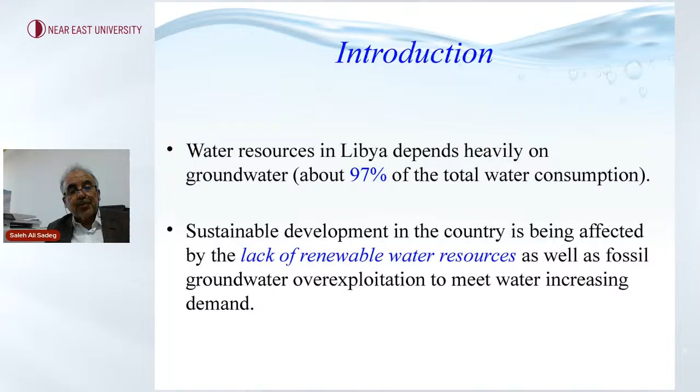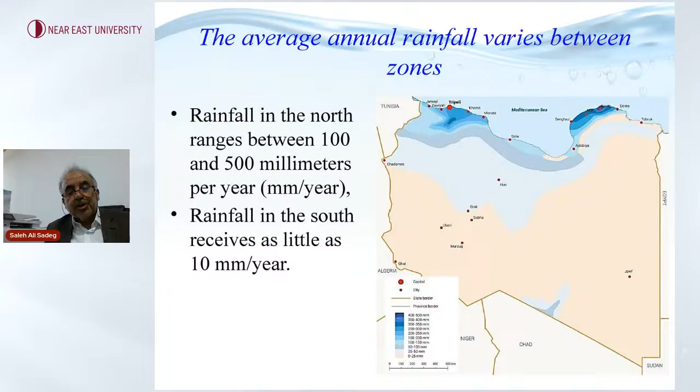The rainfall in the north ranges between 100 and 500 millimeters, while in the south area, which is mostly desert, from 0 to 10 millimeters. Especially in the last 2 years, there were rainfall storms in the desert parts.

Excuse me, can you hear me? Yes, we can hear you clearly. Okay, thank you very much.

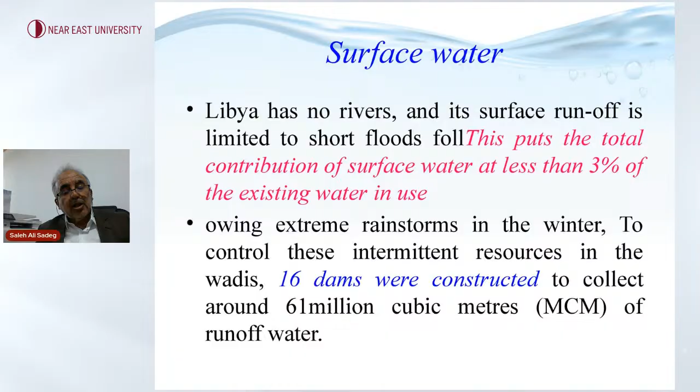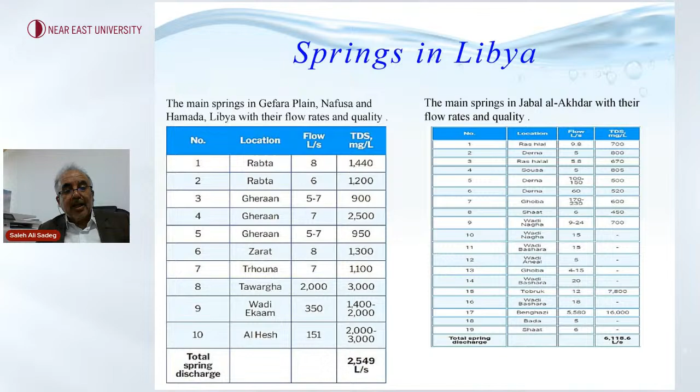The population of Libya is about 7.5 million in 2025. The water resource in Libya: in Libya there are no rivers, and surface runoff is so limited. Only in the northern part, in the west area and the east area, there are many springs, as shown in this table. For groundwater, as I mentioned in the first slide, it makes up 97% of the water demand in Libya.

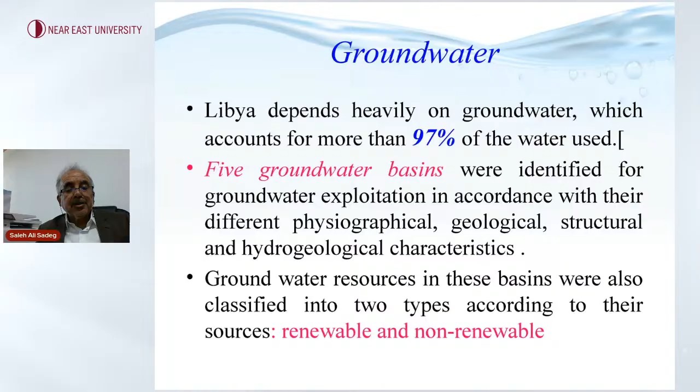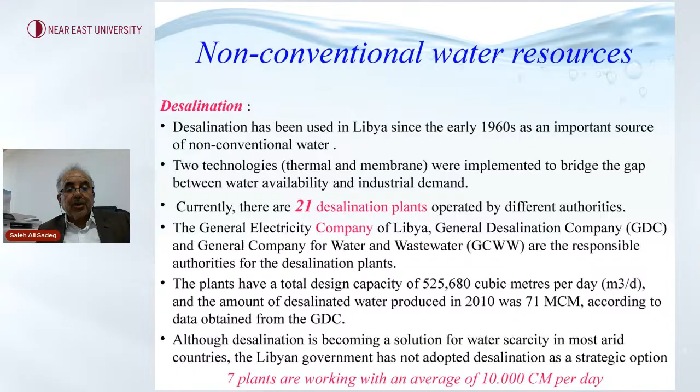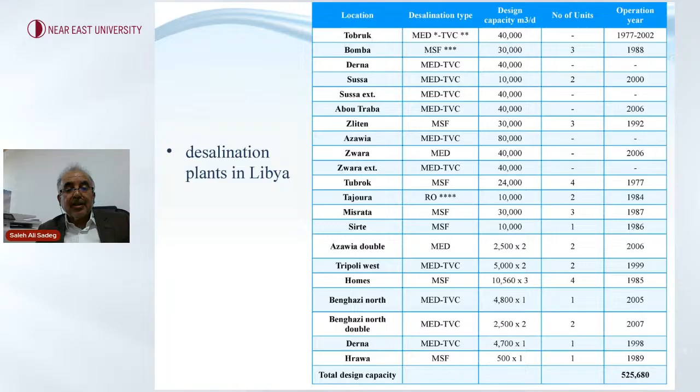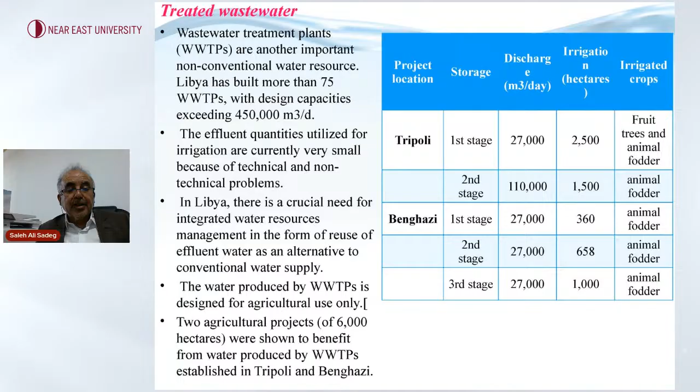For the non-conventional water resources, we have desalination and sewage treatment plants, as we will see in the next slide. This map shows the desalination plants. However, only 7 of 21 plants are working these days, with a production of 10,000 cubic meters per day. In the last 2 years, there was a program to rebuild and maintain some desalination plants in order to increase water production.

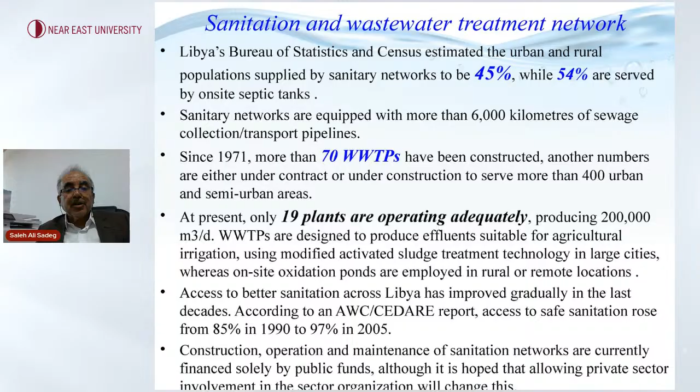This is for the sanitation and wastewater treatment plants. In Libya, there are many wastewater treatment plants; most of them are under maintenance and under construction. The other issue for water quality is seawater intrusion, as shown in this map, and more clearly in the next slide. This figure shows the water table drawdown starting from 1957, 1972 and 1994. This map shows the decrease of the water table in the Tripoli area, where we have the high population.

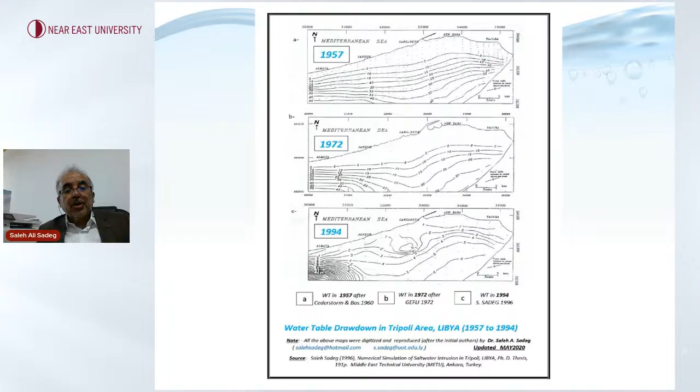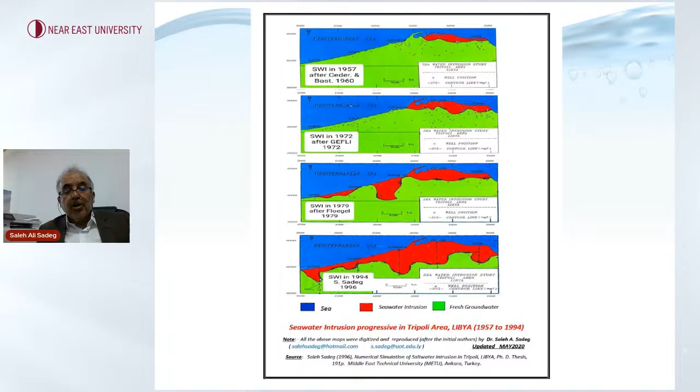The next slide shows the seawater intrusion. In the upper one, in 1957 the seawater intrusion was limited to the northern part near the sea. However, over time and due to high groundwater abstraction, the saltwater intrusion front has moved inland, as shown in the last figure from 1994. We also have seawater intrusion in most parts along the Libyan coastline in the east and west.

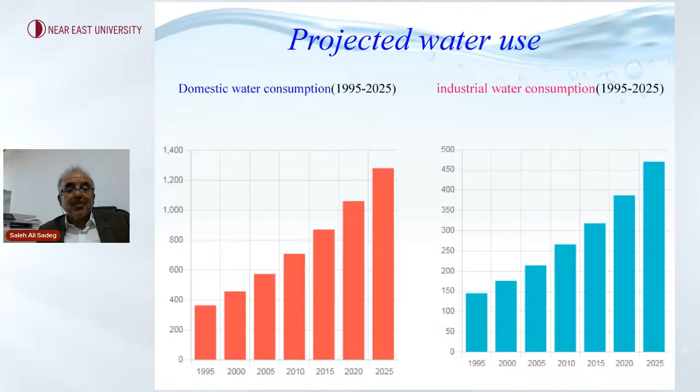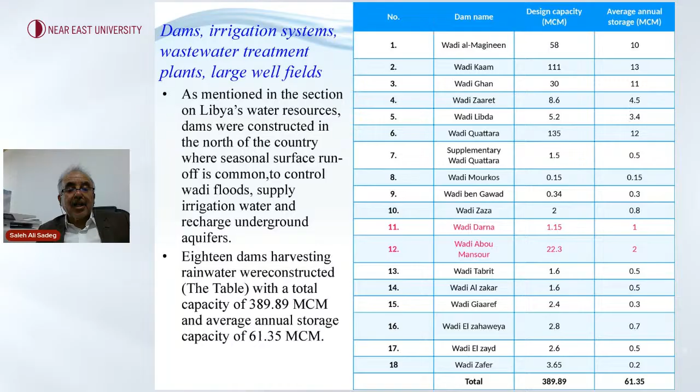In most of the agriculture, they use traditional irrigation, and this leads to high abstraction of groundwater.

We also know the Man-Made River project, where we have three phases. This is the first phase, from the southeast of Libya toward the east and middle, Sirte and Benghazi, where we have the second phase in the western part of Libya. This is to carry water from the Hassouna fields to Tripoli and some cities in the western part

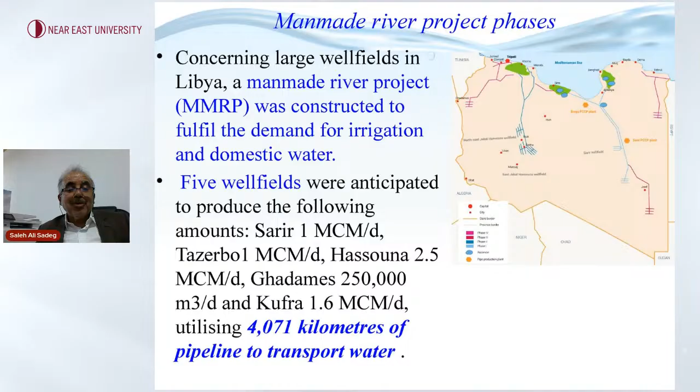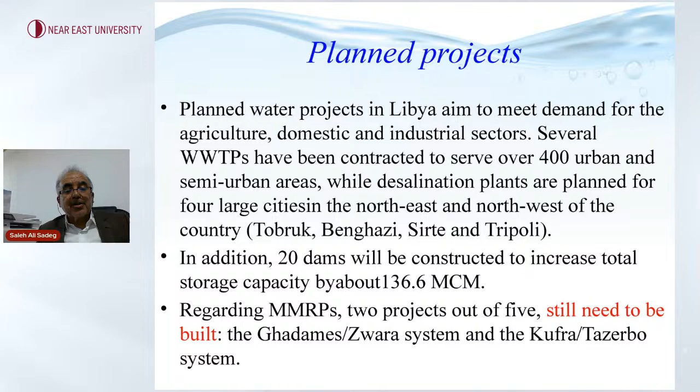of Libya. These days, it is carrying almost 4 million cubic meters daily. As a planned project, the Man-Made River Authority is planning to have two other parts, one in the eastern and one in the western part of Libya.

Water management and change in Libya: since 1972, the General Water Authority has been initiated. This is the only authority in Libya making research studies and even giving permission for any kind of water supply, wells, etc. Lastly, in 2012, a new ministry, the Water Resource Ministry, was established and still up to now is governing all the water subjects in Libya.

Water challenge in Libya. The rainfall is limited; even in the northern part, the maximum does not exceed 500 millimeters yearly, and the average is almost 250. For example, this year we are now in December, at the end of the year, and still we have had only one storm with limited rainfall.

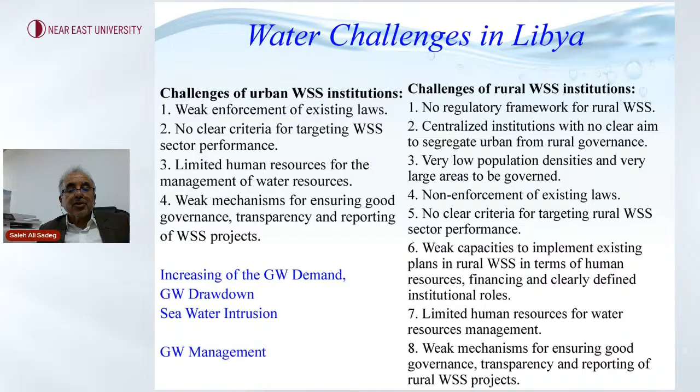So this leads to more groundwater abstraction and water drawdown, and especially in the northern cities of Libya, it leads to seawater intrusion. So we are suffering from this problem. Most of the Libyan water resource problems are due to groundwater management. It's not stabilized; there were always changes from the authorities.

So the challenges are water scarcity and excessive groundwater abstraction, institutional framework, seawater intrusion and water quality deterioration, illegal use of groundwater, poor crop yields, and a groundwater rising problem that recently happened in 3 cities in Libya. As I said, groundwater management is one of the most important points to solve all

the Libyan problems. For the water strategy framework, there was a water resource strategy from 2000 to 2025, this year. Now there are 2 strategies under construction. One is done by the UNDP, and the other by the National Economic and Social Development Board.

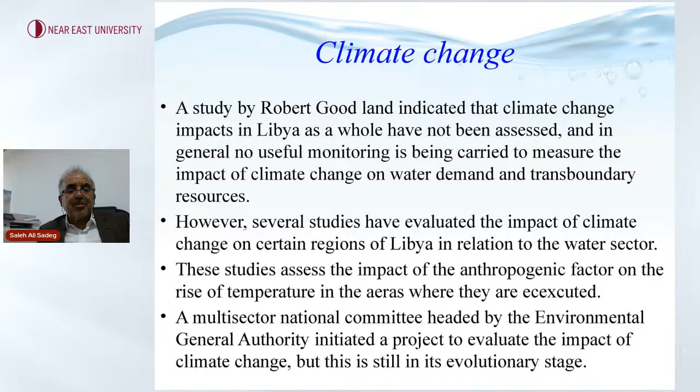Climate change is known by everybody, and Libya is suffering from climate change like most countries, especially in the Mediterranean area. Libya has been suffering from climate change for more than 30 years due to increasing desertification. The desertification is moving from the south to the north, and this has led to decreasing plant cover or agricultural cover, especially in the northern parts.

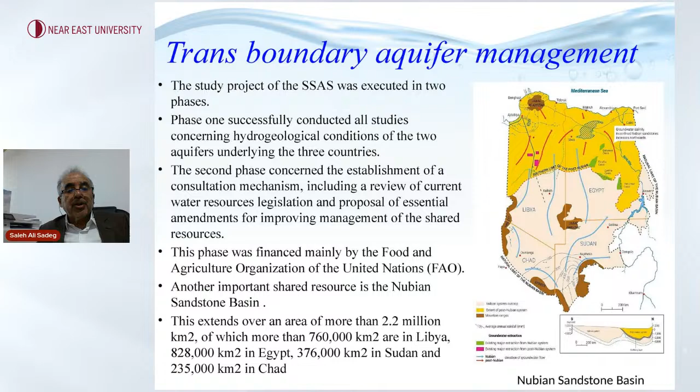For shared water resources, Libya has two well-known shared aquifers: one in the west, shared by Libya, Tunisia, and Algeria, and in the east, an aquifer shared with Egypt, Sudan, and Chad. Both transboundary aquifers have an authority with those countries, and it's doing good management, as a plan for every country to use the groundwater from these two transboundary aquifers.

In conclusion, Libya's biggest challenge lies in developing its water resource sector. Many studies and international projects have been done, and some are still under work. Two projects I have been dealing with, one with the FAO and one with Horizon Europe, lead to management of the water resource.

For the long-term strategy, first of all, we have to develop human and institutional capability in the field of water resources, and this is one of the most important points. We hope to reduce water shortage by developing and upgrading traditional and non-traditional water.

One of the subjects we are working on now is the water, energy, and food nexus. Especially, so much water has been consumed during oil exploration. So we are working on the nexus of these three most important points: water, energy, and food.

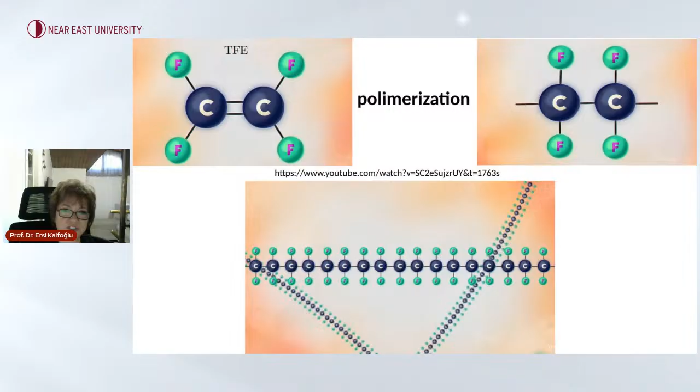This material is the following. Actually, he was working with tetrafluoroethylene, which is 2 carbon atoms with a double bond and 4 fluorine atoms around. And because of the conditions that the scientists have had, a polymerization occurred. Then after this polymerization, we have the big molecules that you can see here. By the way, the pictures you can find them in the link that I share with you.

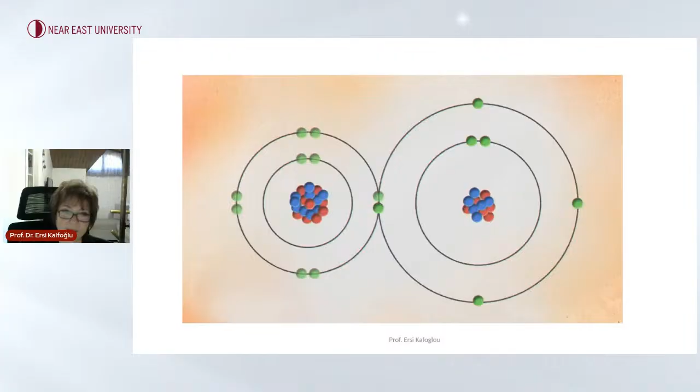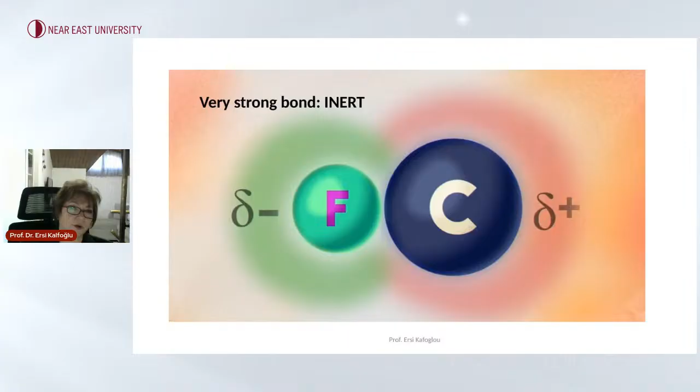Now, what happens and why this new material is very important is the following: the new material is non-flammable, inreactive. It does not react with anything, acid, bases, etc. Therefore, it's a very, very valuable material. Now, how come this occurs is because of the following. We have two atoms. One is the carbon, the other is the fluorine. In here, we have this kind of a bond, which is a very, very strong bond. And this strong bond makes this molecule completely inert, and this molecule does not react with anything.

Now, this very valuable molecule and material started to be used very, very widely at those years in the army. The military decided to use it because of its characteristics in the army and in the materials that are used in the army. However, the name of this polytetrafluoroethylene was not very practical. Therefore, DuPont, the company, decided to rename it and say, take the T, take the FL, and put an on, which was very, very much in mode at that time, like nylon, etc. And they produced Teflon. This is the Teflon that we all know now.

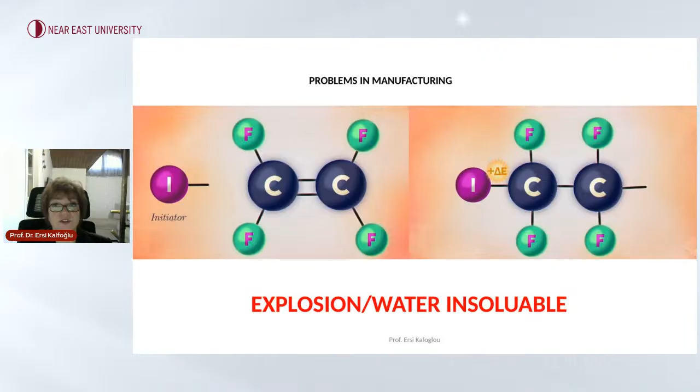Now, for the polymerization of this molecule with the double bonds, we need an initiator. So the initiation is being done with an exothermic reaction. So heat comes out. This is not okay because this finally, for big amounts of reactions, becomes problematic. They have had explosions too. So we had to put it somehow in water. However, it is completely insoluble. It is insoluble in acids and bases. Therefore, it is definitely insoluble in water. So it was not very easily used. It was not very useful once it was only in its solid form.

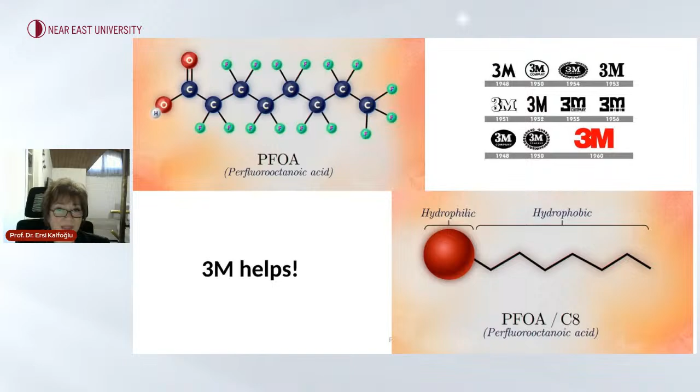There comes another American company, the one that we all know as 3M, and they help. They do what? They introduce another new molecule to the whole issue. This is the PFOA, which is an octanoic acid which has fluorine molecules around, just like the ones that are forming the polymerization. Look at this molecule. This molecule is hydrophilic in the end, the acid unit, and it is hydrophobic in the rest of the molecule. Therefore, it is very clever, and if we put these molecules in an aqueous environment, then those molecules are going to be grouped, and they're going to form some environments that will be ideal for the polymerization.

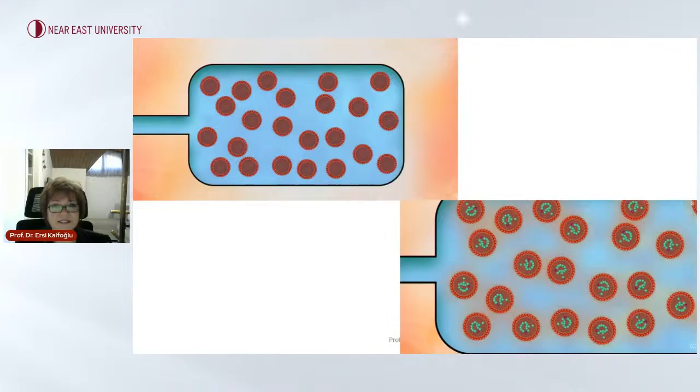Now, you see in the second picture the polymerized material with the initiator as the first reaction and all the surrounding water soluble and insoluble bubble that has been done in water. Now, this was an extremely important progress because, first of all, the exothermic reaction was lowered. We have had water, therefore, water absorbs all the energy that is coming out from the reactions. Secondly, our material, our polymer, is now water soluble. Now, this solubility became extremely important because now we were in a position to put this material to any kind of surface that we want.

Look, and you can see what is happening here. You put the new water soluble material to a surface, and then what happens is that the polymer that we want, that we know, Teflon itself, is absorbed on the surface. This is what we actually need. We want this inert material to cover up the whole surface. This is what we know we're actually using. And you can imagine now that all the rest is all around. It goes to the atmosphere, and we will see what's going on later on. So we have a Teflonized surface. And you can understand from now on that everything was Teflon.

The kitchen utensils were Teflon. All the textile materials that we wanted to be waterproof materials, oil-proof materials, even the packaging and even the food packaging is now Teflonized. This is a very active and very nice solution.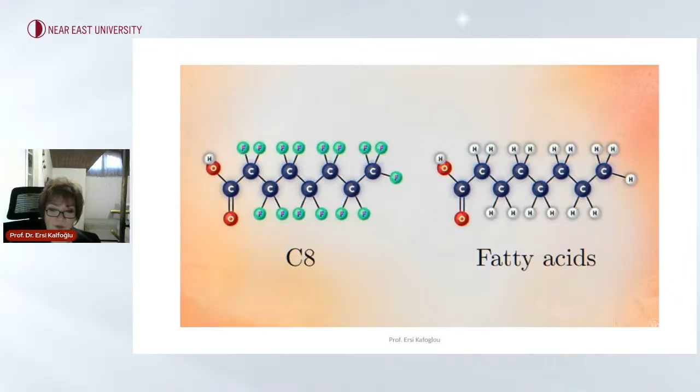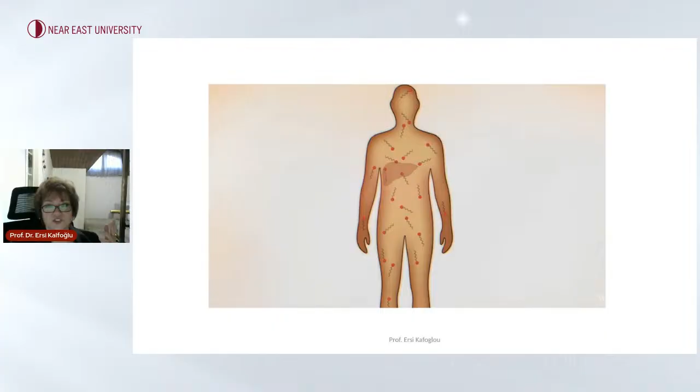You see what? This C8 resembles fatty acids. You see at the right? A molecule of fatty acid, something that we have in our organism. This is how we live. And we know how to metabolize fatty acid, but we do not know how to metabolize C8. Therefore, C8, as soon as it is introduced to our organism, it is going to go everywhere and accumulate everywhere. Once it is not metabolized, it is accumulating in the organism because it is water soluble. It's not like Teflon, it is water soluble.

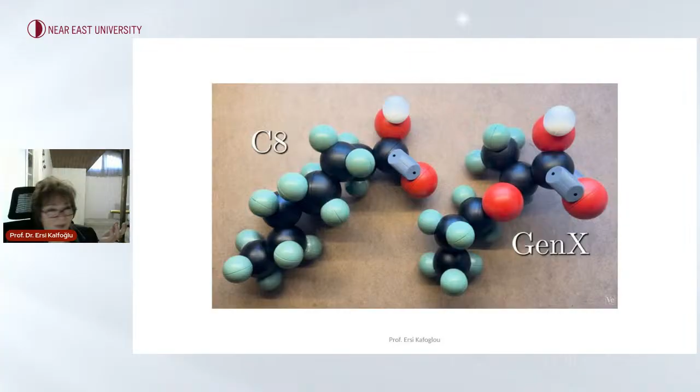All right, and this is very new. I mean, it is like the 80s. People realized that yes, this C8 is really a problem for the organism. Okay, we have not to use this molecule. Fine, we do not use this molecule, but we use other molecules that are of exactly the same function. They are equally problematic for the organism, but they're not called C8. They are called GenX.

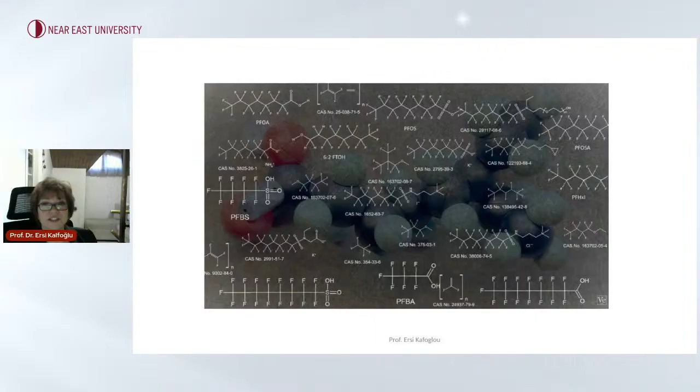And actually, here are the thousands of different molecules that do the same thing, resemble each other, and are extremely harmful for our organism. Those thousands are around, but now you can see those that are mostly present in whatever we're using today, from lipstick even to lenses. This material is very, very useful, very easy to use, and that is why it is so problematic.

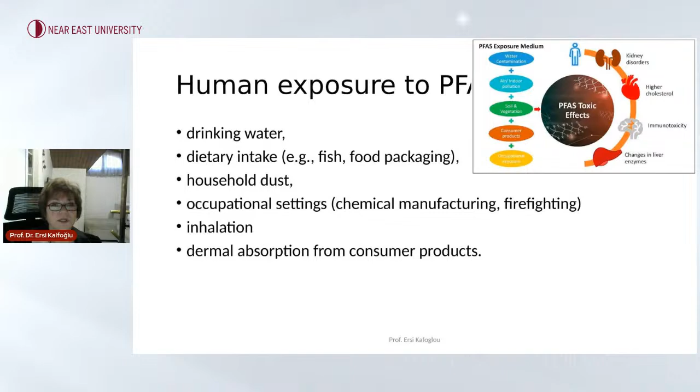Now, where and how are we exposed to these PFAS molecules? Everywhere: in drinking water, in dietary intake, because dietary intake is completely related to water, in household dust, in all kinds of occupational settings, in chemical manufacturing industries, firefighting, because the foam that we are using to extinguish fire is full of these molecules. Actually, it is full of Teflon. Therefore, the atmosphere is full of PFAS molecules because of this. We get it by inhalation, but we can also have it by dermal absorption, which is still awful.

Now, what are the health outcomes that we know? We have kidney and testicular cancers. We have problems in all kinds of genitourinary cancers. We have immunotoxicity, so our immune system goes negative. Those two are interrelated. Actually, children are not being affected that nicely by vaccines. We have higher infection rates exactly because of our reduced immune system efficiency. We have preeclampsia in pregnant women, and we have problems in the development of the fetus in the intrauterine stage.

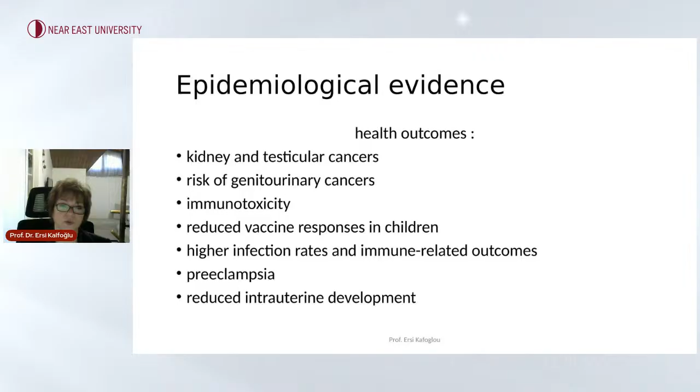Therefore, we are talking about an awful molecule, and unfortunately, the problem is that we do not have one kind or two kinds of molecules that we are being exposed to. We are exposed in mixtures. Whoever is using any kind of material, we are exposed to a mixture of it. And you may understand that this mixture may be even worse because it accelerates the actual effect of the molecule.

What is the case in Turkey? Do we know? Do we have any risk assessment activity? Unfortunately, we do not have monitoring or biomonitoring programs or a database of how many people have PFAS molecules in their blood or in their organs. You know what?

Unfortunately, there has been a study in the United States. It's a massive study to see what is the amount of PFAS molecules that are present in the organisms. And unfortunately, they weren't able to find one single person that does not have PFAS in their organism. Therefore, you can understand how big the problem is and how new the problem is actually.

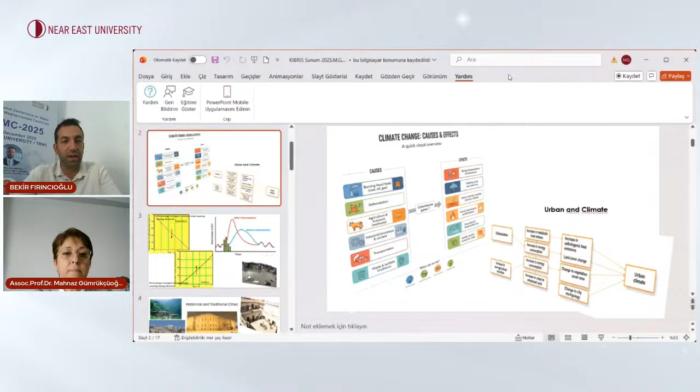How can I do it? There is another option. The other option is, again, from the present button, from slides and PDFs. Yes, I think it's fixed, hocam. We can see it now. You can make it full screen. Hocam, we can see it. It's all right. If you press again on the presentation file, you can make it full screen by pressing F5. Yes, full screen. Okay. Is it okay? You should make it full screen again. Yes, hocam. We can see it. Sorry for the delay. No worries, hocam. Floor is yours.

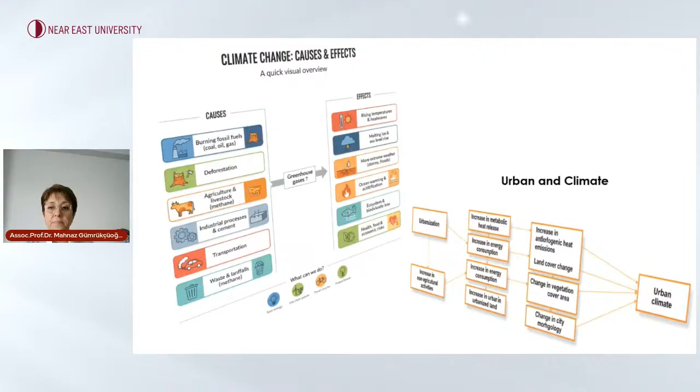The cities' effects are very important. For example, with urbanization, the hard impervious surfaces have increased, causing rainwater to run off the surface and increasing flooding risk. The graph shows a clear change in the peak flow and timing before and after urbanization.

Another effect of urbanization is reducing heating demands in some areas while increasing cooling demands in other areas. For example, as you see in the graph, the heating demand is decreasing in Istanbul, while cooling demand and related emissions are increasing in Adana.

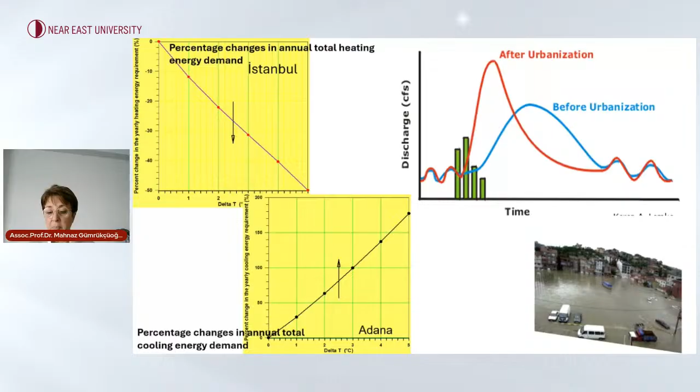If we consider this situation for the Turkish Republic of Cyprus, for example, Cyprus also has a Mediterranean climate. And in this area, the hot periods will last longer in the future. It means the need for cooling and electricity consumption will increase, of course. Therefore, the climate resilient living cities approach in Cyprus urban planning should focus on passive cooling, high albedo surfaces, and energy efficient buildings.

Cities today are like this, but in historical periods, traditional cities were designed with an ecological approach and were sensitive to the climate. As the photos show, shaded streets, architecture that balances solar exposure, window designs that regulate heat, and buildings constructed with local materials that provide thermal insulation are all examples of climate adaptation in traditional urbanization.

Because of the Industrial Revolution, this knowledge was unfortunately pushed into the background. But the living cities approach updates this heritage and carries it into climate resilient urban design for today.

Here you can see the settlement of the city of Kahun in ancient Egypt. In Kahun, streets and buildings were arranged based on the prevailing winds. They were also positioned to protect the people from hot desert winds. This is an early example of ecological or passive design for natural ventilation and shade. It means they stay cool without using energy. The living cities approach takes inspiration from historical examples like this, using more advanced methods, of course.

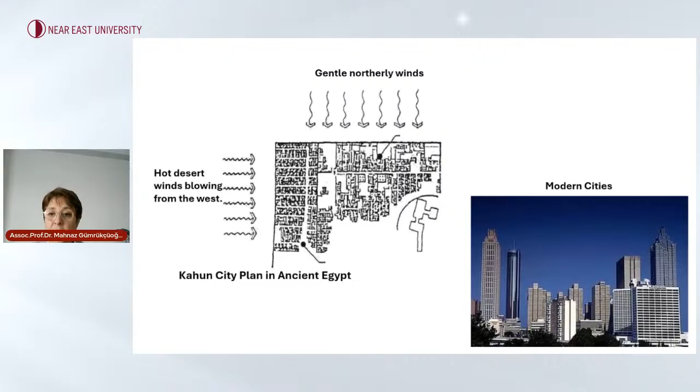In cities created without considering urban design principles, the urban heat island effect occurs. It is a phenomenon where city centers are warmer than their surroundings, as you see in these graphs. The main causes are dark heat-storing surfaces, heat emitted from industry and vehicles, a lack of green areas, reduced evaporation, and weakened wind circulation. As a result, energy use and emissions for cooling increase and air quality deteriorates.

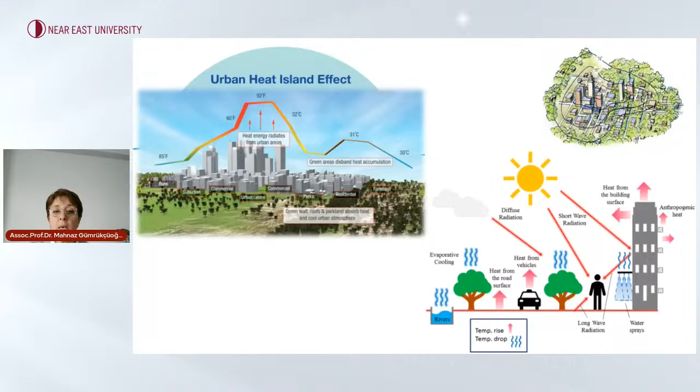One of the most important factors in the formation of the urban heat island is urban geometry. In other words, elements such as street canyons and building height and density can slow down the wind, and therefore heat accumulates more easily. As you see on screen, if a tall building blocks the wind of another building, airflow is disrupted. Also at ground level, this can create strong turbulence. Wind speeds up over the roof; on the sheltered side, turbulence increases. Therefore, it is very important to protect wind corridors along the prevailing wind direction. It means urban form should be blended together with microclimate analysis.

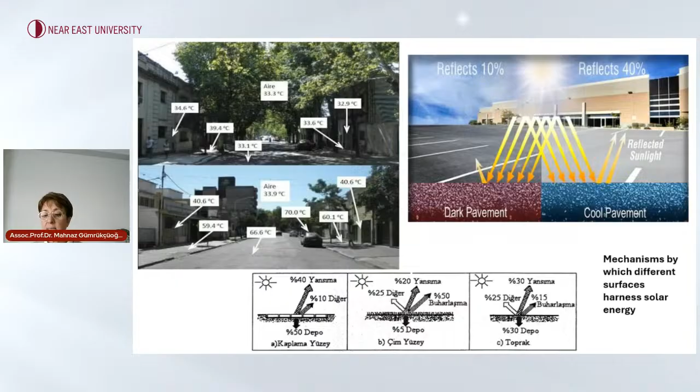The geometry is very important, but the material choice for urban ground surfaces also directly affects the microclimate. Dark impermeable road and sidewalk surfaces store more heat, while high albedo cool surfaces and roofs and vegetation absorb less heat and help reduce urban temperature.

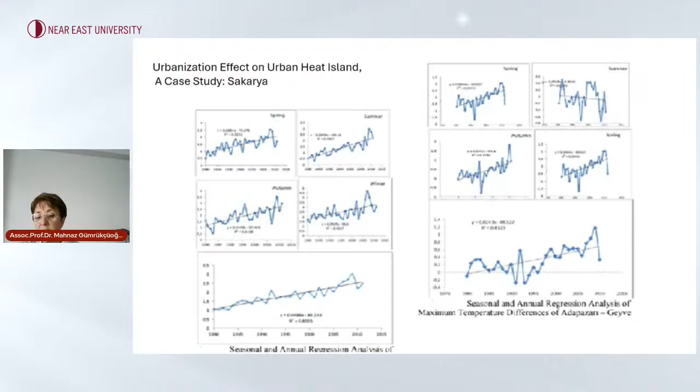As an example, in our study on the urban heat island in Sakarya city, we used Adapazarı district as the urban station and Geyve as the rural station. We compared long-term temperature, precipitation, wind, and humidity data. The results show that Adapazarı is warmer than the rural area due to increased urbanization, the number of buildings, a rise in motor vehicle use, and reduced wind speeds. The graphs also show a clear increase in the differences between minimum and maximum temperatures. This makes it clear that urban heat island effects can be observed at the local scale.

Every step taken to reduce the urban heat island also helps make cities more ecological. The ecological city is a sustainable living model where energy, transportation, water, waste, land use, and social sustainability are managed together in an integrated and coordinated way. In redesigning a city ecologically, identifying the city's ecological footprint is a priority. The ecological footprint, as you know, shows the biologically productive area needed to produce the resources a city consumes and to absorb its wastes, making the city's pressure on the climate and the environment visible.

Local studies show that components vary from city to city. For example, Sakarya city is our study. We calculated the biocapacity required to offset transportation emissions, the footprint from built-up areas, waste and recycling processes, and CO2 emissions linked to animal-based food production and electricity consumption. As the graphs show, the largest component was heating. Therefore, to reduce Sakarya's ecological footprint, energy consumption and transportation were emphasized. Alternative solutions should be prioritized. The Sakarya case showed the distribution of the ecological footprint components and indicates which areas should be addressed first.

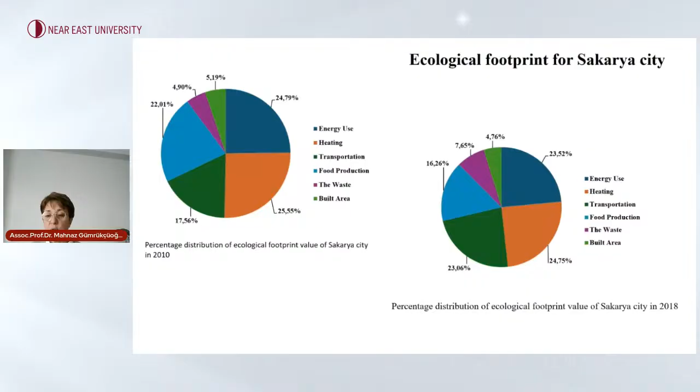The structural indicators of the ecological cities are natural ventilation, passive shading, advanced purification systems, green and water corridors, green or white roofs, and waste recycling.

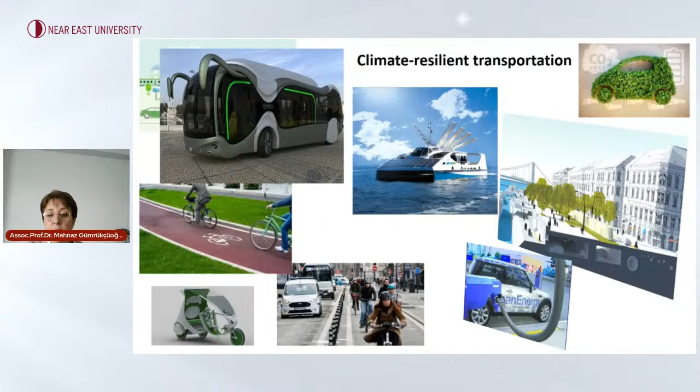In eco-cities we should also use railway systems and public transportation, walking and cycle ways for the low-carbon transition, along with cleaner-fueled vehicles and underground parking areas. The goal here has two sides. The first is to reduce emissions. The second is to create a transportation system that is resilient to climate impacts.

Climate resilient and resource efficient cities are emerging with different solutions in different regions. There are many examples all over the world. Examples include cities in the Netherlands, Kazakhstan, Germany, and the very special Masdar city. These cities aim to become global hubs, integrating renewable energy, clean technology, and nature-based solutions. Nature-based solutions are very important. If cities back up hard solutions such as engineering work with soft nature-based solutions, everything becomes much more effective.

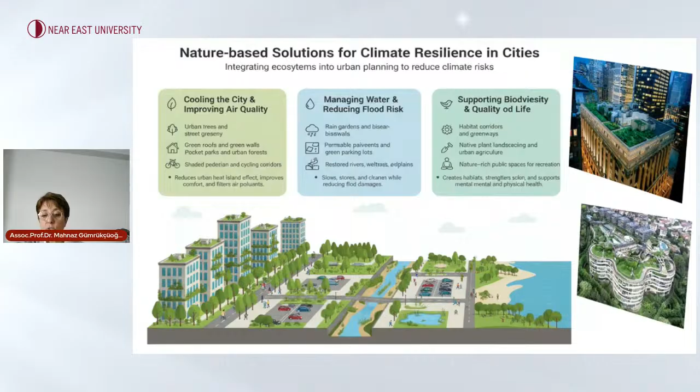This includes limiting construction in high-risk areas, creating blue and green networks and park corridor systems, setting incentives and standards, and improving education and public participation. For real long-term change, we need to balance technology with nature and keep ecological and social justice at the center of these decisions. In conclusion, more than half of the world already lives in cities, and this share will keep growing.

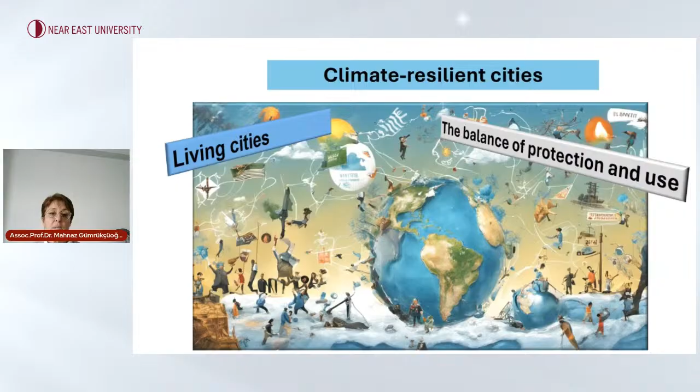That's why today urban system sustainability is more important. The living cities approach sees the city not as a fragile collection of buildings, but as a living system. It argues that all planning should be done with this perspective. This is the end of my presentation.

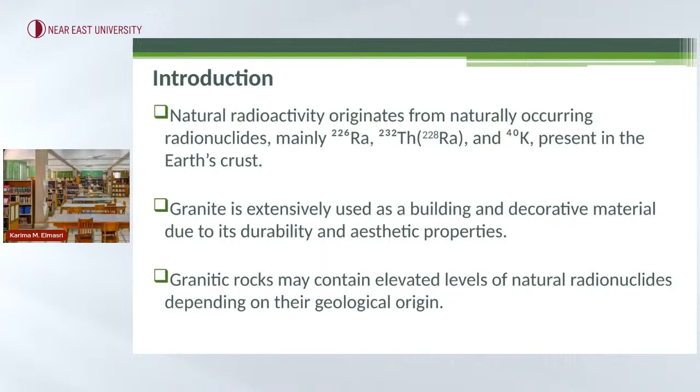So here are the contents. To introduce the study, you know that there are radioactive materials we call NORM. There are three types: uranium-238, thorium-232, and potassium-40, radioactive materials occurring in the earth's crust. Granite is extensively used as a building material and also as a decorative material due to its durability and good properties, and this type of rock has proved to contain elevated levels of NORM.

The use of granite in indoor environments leads to gamma exposure, and especially radon, an alpha emitter, and inhaling this type of gas may cause a lot of health problems, such as lung cancer. Libya usually imports large quantities of granite from many countries, especially Asian countries, with limited radiological screening. Actually, there is no enforcement for companies to screen their materials, especially building materials.

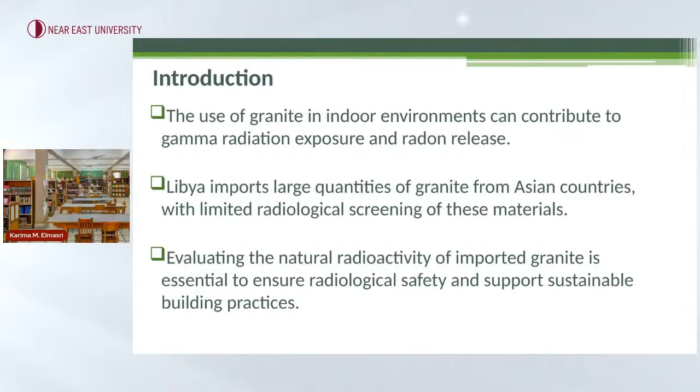So we evaluate the natural radioactivity of imported granite to ensure radiological safety and support building practices. The aim of our study is to measure the activity concentration of radium-226, thorium-232, and potassium-40, then evaluate the radiological hazard indices associated with the use of granite as a building material, assess the compliance of imported granite with international radiation safety standards, and provide scientific recommendations to support safe and sustainable construction practices in Libya.

So the methodology of this. In this study, we studied a lot of samples. Eleven samples were collected from commercial suppliers, especially imported from different Asian countries. These samples were prepared by crushing, drying, sealing, and stored for more than one month to achieve secular equilibrium. Then the activity concentrations were measured using a high purity germanium gamma spectrometry system.

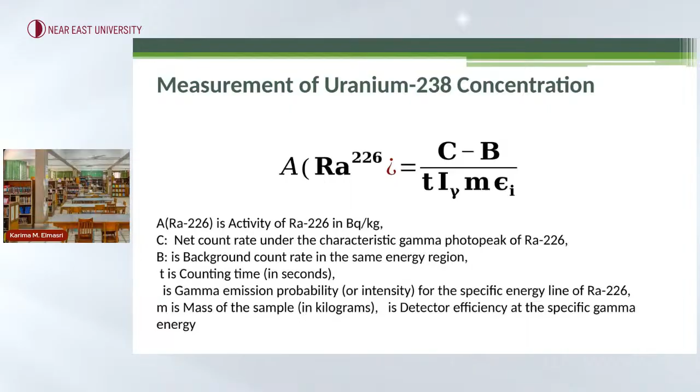So we used this equation, calculated the area under the peaks of each energy, and also subtracted the background, and our measurements were overnight for 24 hours. For each element, we used the same equation but different energy lines, and the radiation hazard indices were calculated starting from the radium activities.

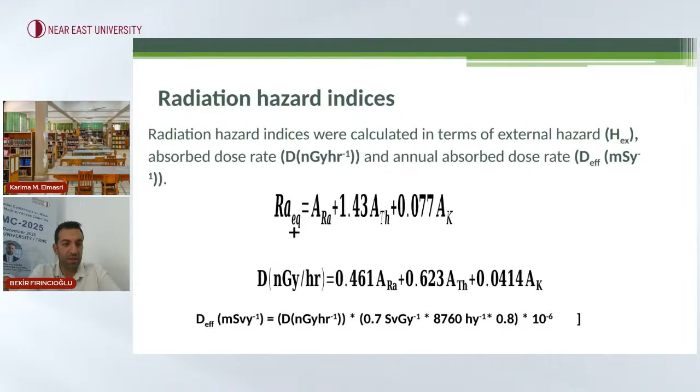Is there any problem? Hello? Karima Hocam, everything is going great. There is no problem at all with your connection. Okay, thank you so much. Sorry.

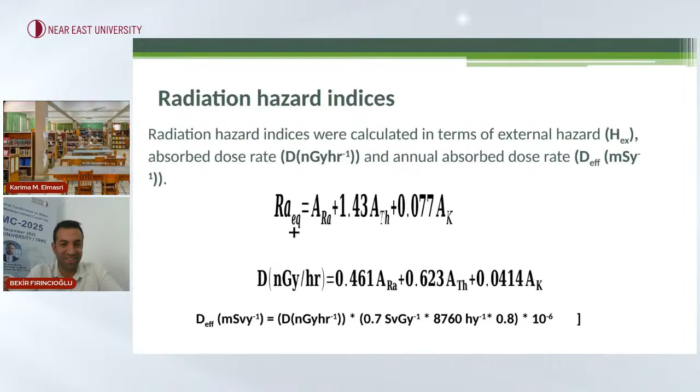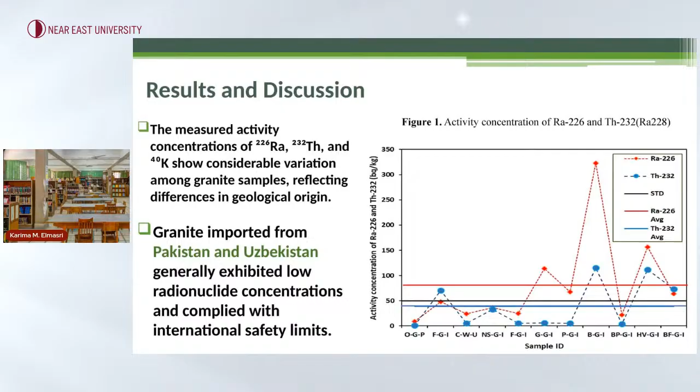So let's go to the results. What we found: for most of our samples, radium, thorium-232 and potassium showed considerable variation among the granite samples, reflecting differences in geological origin. The granite imported from Pakistan or Uzbekistan generally exhibits low radioactive concentration. So it's clear that most of the Indian samples exhibited high radioactive concentration.

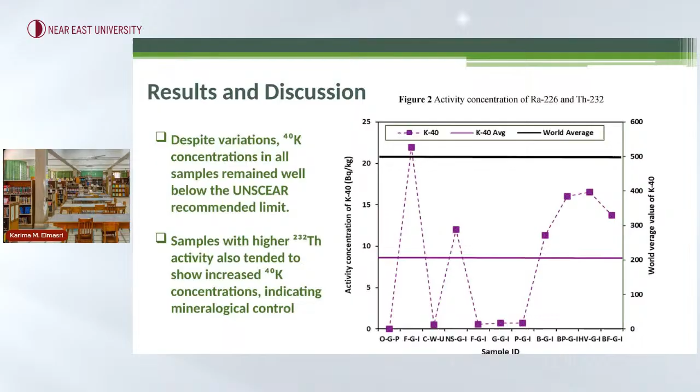And to do more calculations, we also measured potassium, higher in some samples, but it remained below the UNSCEAR limits in many samples. The radium equivalent is important to know if these samples are at permissible or accepted levels.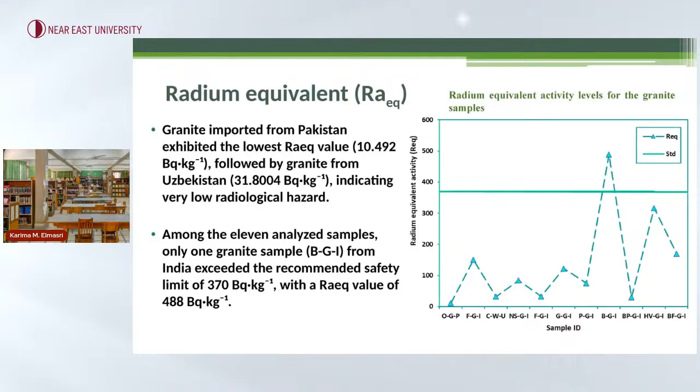We found the lowest Ra equivalent value was 10, followed by 31 from Uzbekistan, which were very low radiological hazards, and one from India exceeded 370, at 488 becquerel per kilogram. The external hazard was also calculated, and the same sample from India recorded 1.31, which is higher than the permissible limit from UNSCEAR and other committees.

For the absorbed dose, the absorbed dose rate ranges from 4.8 to 221 nanogray per hour, with the lowest and highest from Pakistan and India, respectively. The mean absorbed dose was about 62 nanogray per hour, while the UNSCEAR global average level was 84 nanogray, so it was within the limit. The annual effective dose rate was between 0.02 and 1.16 millisievert per year.

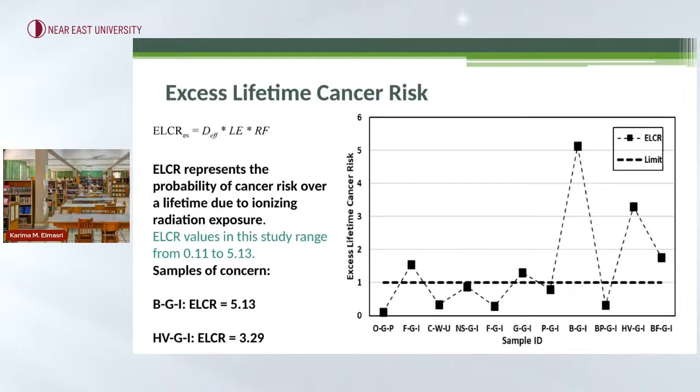From this calculation, we can also calculate the excess lifetime cancer risk. ELCR represents the probability of cancer risk over a lifetime due to ionizing radiation exposure, and it ranged between 0.11 and 5.13. For one of the samples from India, the ELCR was 5. Pretty high.

So to conclude this study, several granite samples from India showed radium-226 activity exceeding 80 becquerel per kilogram, and two of these samples exceeded the recommended limits for thorium, and only one granite sample from India exhibited radium equivalent activity above the recommended 370 becquerel per kilogram. The granite samples imported from Pakistan and Uzbekistan showed lower radiological hazards,

while BGI exhibits elevated values across multiple hazard indices, including radium equivalent, annual effective dose, and ELCR, raising concerns regarding these samples.

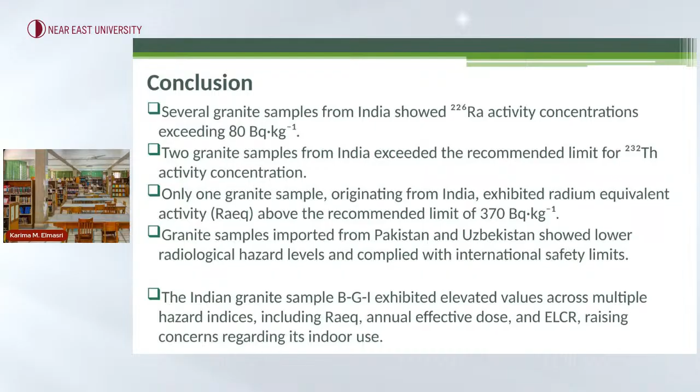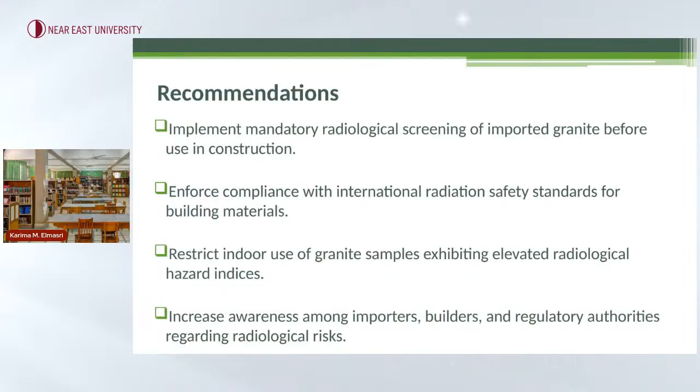We also have some recommendations from this study: implement mandatory radiological screening of imported granite before use in construction, enforce compliance with international radiation safety standards for building materials, and restrict indoor use of granite samples exhibiting elevated radiological hazards. Finally, increase awareness among importers, builders, and authorities regarding the radiological risks. So this is the last slide.

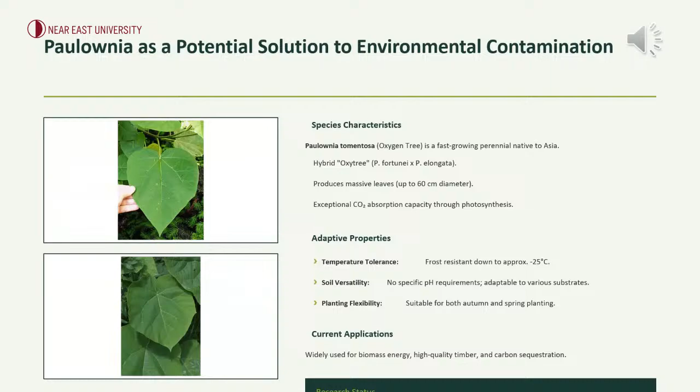That's why we decided to prepare this research. The aim of this presentation and the article which we submitted to the journal is to investigate the possibility of using Paulownia to clean soil from pollutants, both organic and inorganic, generated during the migration of leachate from municipal waste landfills. The test was carried out with the concentration of leachates and compared with the conditions of watering with distilled water.

Research shows that Paulownia can be used as a plant for remediation of areas around waste disposal sites, but only if the appropriate concentration of leachates and selected metals are maintained.

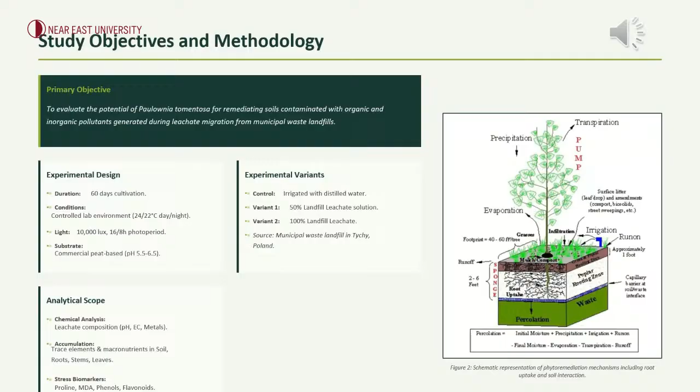The seedlings were cultivated in commercial peat-based substrate. The cultivation was carried out for 60 days at a temperature of 24-22 Celsius degrees, depending on the day or night, at a light intensity photoperiod of 16 and 8 hours and a humidity level of 82%. Once a week, the plants were watered with a 100% and 50% solution of leachate, respectively. Substrate without the leachate was established as a control.

After 60 days of cultivation, part of the plant material was stored at minus 80 Celsius degrees prior to analysis. The part of the plant material, aerial parts and roots, that was for element analysis was washed with tap and deionized water and dried to a dry weight at 105 Celsius degrees.

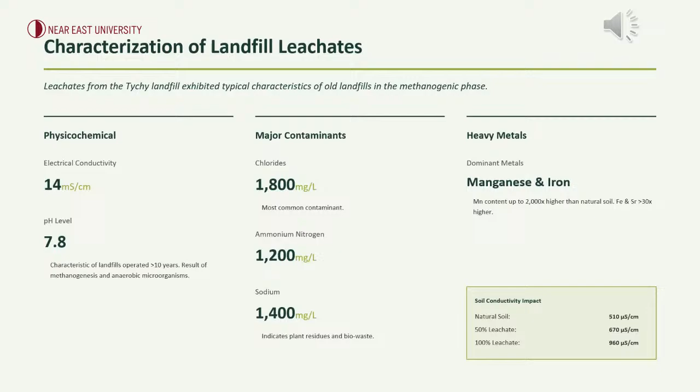The leachate used to water the plants had an electrical conductivity of 14 millisiemens per centimeter and a pH of 7.8. The chemical composition was determined primarily by high concentration of chlorides, nearly 2,000 milligrams per liter, ammonium nitrogen more than 1,000 milligrams per liter, and sodium 1,400 milligrams per liter.

Ammonium nitrogen is indicated in the literature as one of the main pollutants present in the liquids, usually reaching values up to 1,000 milligrams per liter and decreasing slowly with age. Therefore, even in the liquids from old landfills, it occurs in high concentrations. However, the high sodium content in the analyzed liquid may indicate the presence of plant residues and other bio-waste in the landfill, and confirms that even with the passage of time of landfill operation, it's not subject to change due to the process occurring inside.

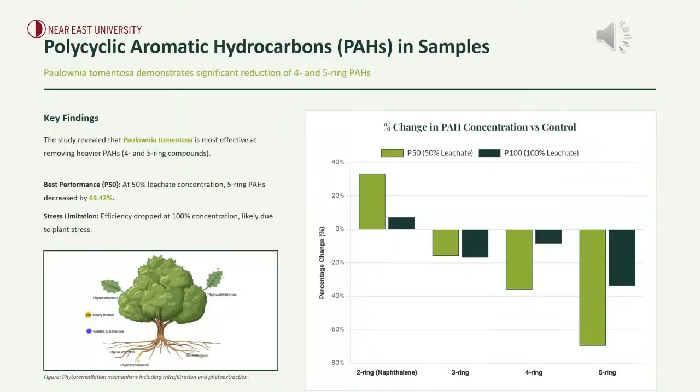In the case of macronutrients, an increase in the concentrations can be observed with increase in leachate content. For calcium, an increase of approximately 24% was observed compared to the control sample. For nitrogen, an over five-fold increase in the content was observed. Increases were also observed for the remaining macronutrients. Phosphorus content was higher in the 50% sample than in the 100% sample. No uniform rule can be derived for micronutrients.

In the case of iron and manganese, slight differences between the variants were observed. Minimal fluctuations were also observed for copper. In the case of lead and zinc, an increase in soil content was observed in the 50% and 100% samples. For lead and zinc, this was a very significant increase, by approximately 50% for each nutrient. The opposite trend was observed for iodine. The content of this component decreased with increasing leachate concentrations.

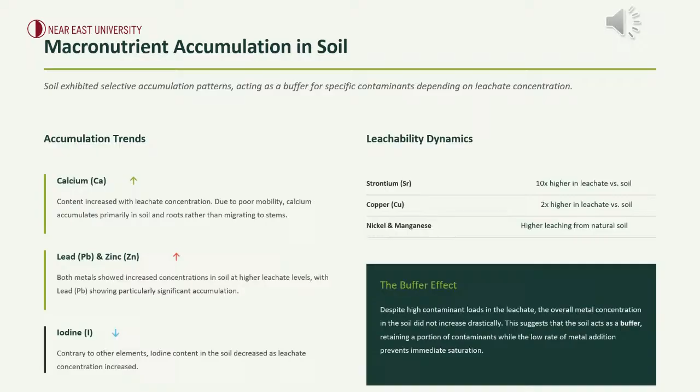Here we can see selective increases in aerial plant parts at elevated leachate concentration in the case of potassium, sulfur, phosphorus, lead. We can say that roots serve as the primary defense barrier and accumulation sites. Primary accumulations in the case of magnesium, sulfur, and phosphorus, so we observe significant increases. In the case of phosphorus, it was nearly doubled at 100% sample. The greatest accumulation in roots in the case of nitrogen, and decreasing trends were observed in the case of aluminium and iron.

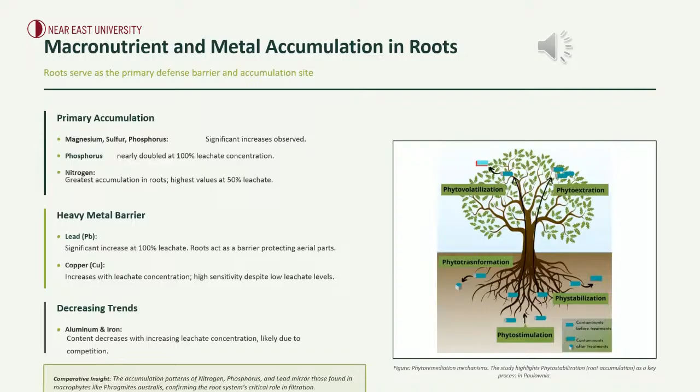However, in the case of lead and copper, it could be treated as the heavy metal barrier. A significant increase was observed at 100% leachates in the case of lead. And in the case of copper, increases with leachate concentration were observed.

Proline and amino acids accumulated in plants under the influence of osmotic or toxic stress, natural antioxidants such as phenols, flavonoids, and ascorbic acid, as well as a marker of cellular damage, malondialdehyde, were taken into account. Physiological parameters such as MDA and proline content serve as important indicators of plant stress. MDA is a byproduct of the peroxidation of polyunsaturated fatty acids resulting from reactions with reactive oxygen species, which act as early signal molecules in the plant stress response.

Total phenolics and total flavonoids exhibit strong redox properties, functioning as reducing agents and hydrogen donors. Together with ascorbic acid, these compounds represent essential components of plants that contribute to a wide range of beneficial physiological and health promoting effects. The increase in proline levels at 50% and 100% samples indicates a plant defense response to environmental stress caused by the presence of heavy metals or salts in the leachate.

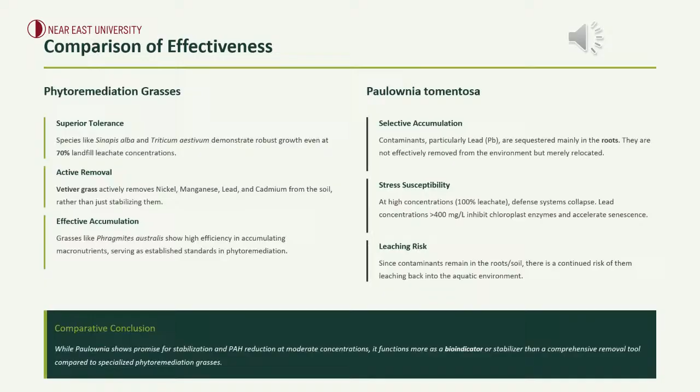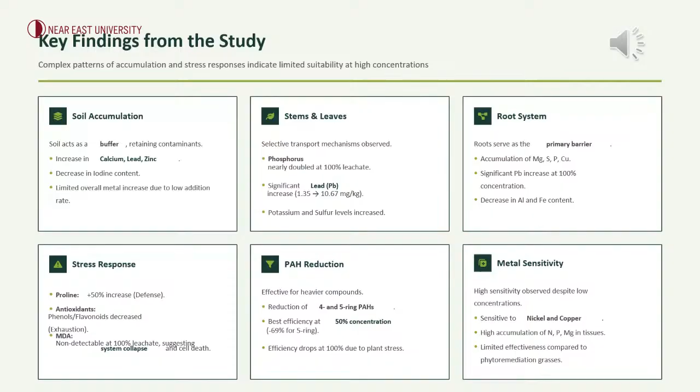The study revealed differential patterns of contaminant accumulation in Paulownia plants and soil. In the soil, calcium, lead, and zinc increased at higher leachate concentrations, while iodine decreased. Macronutrients such as potassium, sulfur, and phosphorus increased in stems and leaves, with phosphorus nearly doubling at 100% leachate concentrations. Stress biomarker analysis revealed that Paulownia exhibited a defensive response to environmental stress. Proline levels increased significantly at 50% and 100% leachate concentrations, suggesting a response to heavy metals or salts.

However, phenol and flavonoid levels decreased with increasing leachate concentrations, likely due to their consumption in neutralizing oxidative stress or inhibited biosynthesis. MDA values, a marker of cell damage, show a surprising decrease at higher leachate concentrations, particularly 0 at 100% concentrations of leachates, suggesting extreme chemical stress leading to damage to the antioxidant system and cell death.